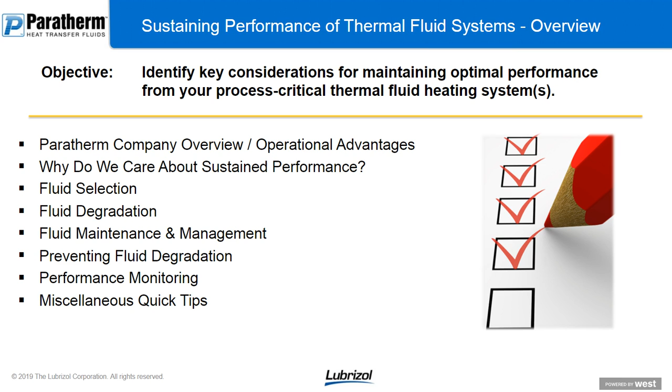A quick word about Paratherm. Paratherm was founded in 1988 and later acquired in 2012 by the Lubrizol Corporation. Lubrizol is a wholly owned Berkshire Hathaway company. Established in 1928, Lubrizol is a global leader in specialty additives, advanced materials, and oil field solutions. Paratherm operates under the CPI Fluid Engineering Industrial Products segment of Lubrizol.

Modern day, Paratherm offers a range of fluids engineered for closed-loop liquid phase thermal fluid systems for heating, cooling, or both, with operating temperatures from negative 127 degrees Fahrenheit to 675 degrees Fahrenheit.

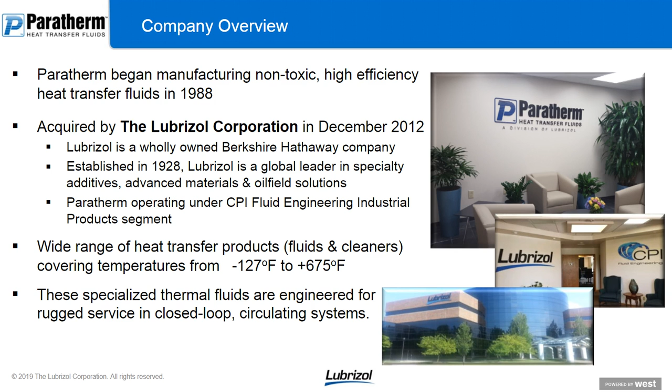Some key advantages of working with Paratherm: products are stocked strategically across the world, and material is always ready to ship. There are essentially no lead times. 24-hour emergency shipping is available, and sales and technical support is also available around the clock.

When it comes to quality, compliance, and technical resources, Paratherm is backed by world-class support through the Lubrizol network, with extensive test capabilities, a highly efficient supply chain, and extensive regulatory knowledge.

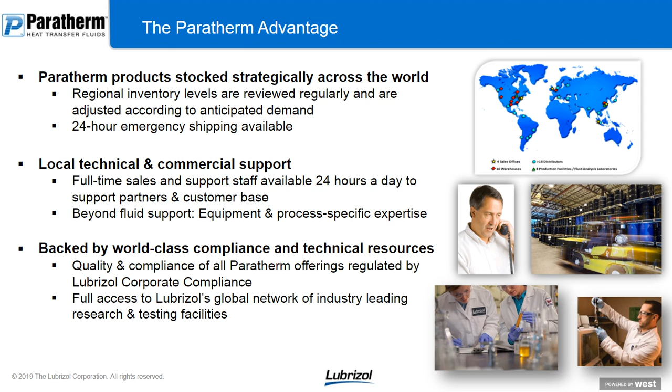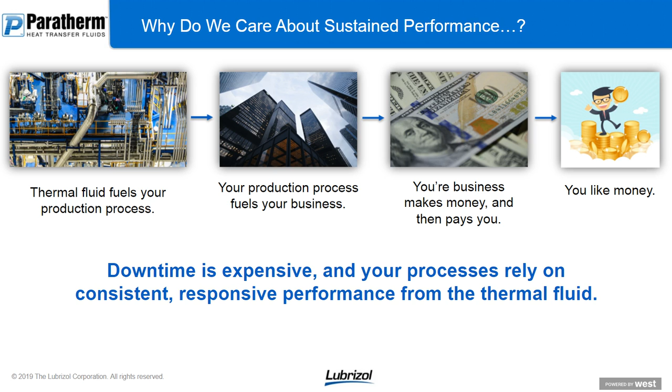So let's jump right in. Let's ask ourselves, why do we care about sustained performance? It's simple: thermal fluid fuels your production process, your production process fuels your business, your business makes money, and then they pay you, and you really like money. In all seriousness, downtime is expensive, and your processes rely on consistent, responsive performance from your thermal fluid. That is truly why we care about sustaining performance.

So let's talk about how fluid selection impacts sustained performance of your thermal fluid. Some definitions: what are we talking about? We're talking about heat transfer fluids, also known as thermal oils or thermal fluids, heating and/or cooling fluids, hot oils, etc. Often a thermal fluid may be recognized solely by its brand name, such as Paratherm. The point is, I want everybody to be aware that there are several aliases for heat transfer fluids, and you may come across one or more of these terms when comparing fluids from different suppliers.

For those who are not aware, some characteristics of thermal fluids: unlike steam systems, thermal fluid systems are capable of generating high temperatures with low system pressures. When properly operated and maintained, thermal fluids offer safety, little ongoing maintenance, and long operating lifetimes. Thermal fluids are highly efficient, non-corrosive, and allow for accurate, uniform temperature regulation in a wide variety of processes.

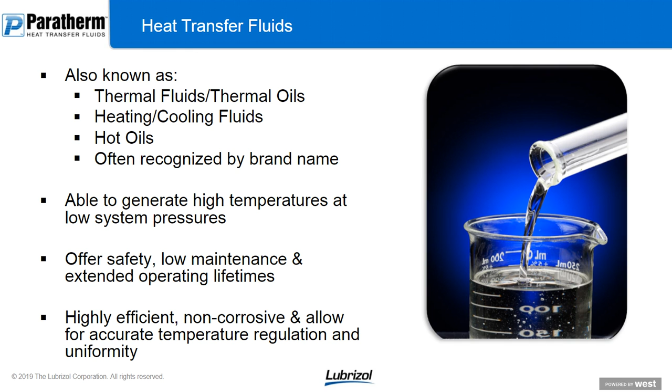In terms of fluid classifications, there are a plethora of different chemistries available on the market that can be considered heat transfer fluids. By far, water and glycols tend to be the most widely utilized. However, they are limited in their operating range, and that's where a lot of the other chemistries come in.

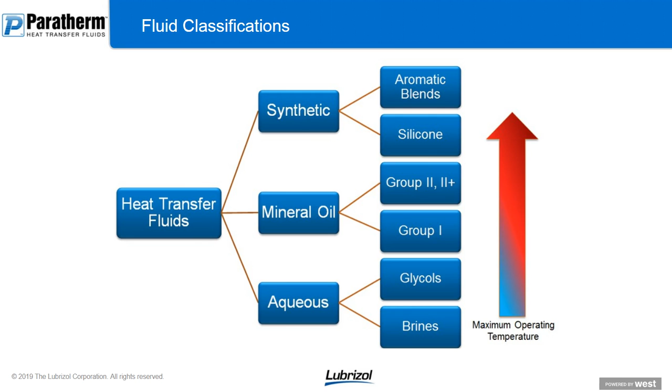So first and foremost, selecting the proper fluid. The most important aspect of sustaining performance is using the proper fluid matched to your application. There are several selection criteria to focus on when making the right choice for your thermal fluid system. The questions for consideration are, what are the minimum and maximum operating temperatures going to be? What is the lowest startup temperature that could be experienced given the climate and environment?

What is the fluid purity? Lower purity fluids may have higher fouling potential. Is there any benefit to using a fluid with specialized additives in your application? Something to note is that additives may narrow the operating range of the fluid.

Is there any preference for a synthetic fluid versus a mineral oil? Are there any considerations to be made with existing fluid chemistry or any handling and disposal concerns at the plant level?

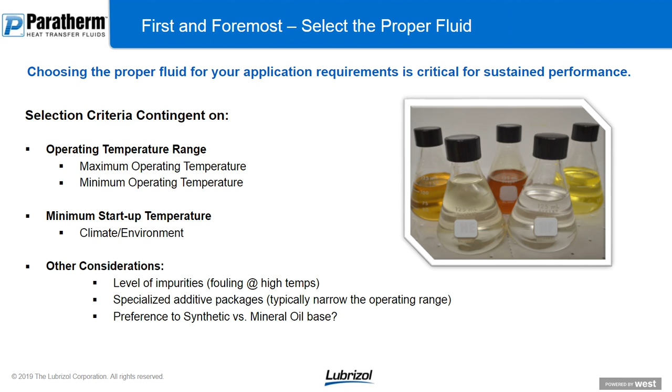And then there are process considerations which may also affect the fluid choice. Is this an existing system? If so, then fluid compatibility must be taken into consideration. You don't want to mix fluids that might not be 100% miscible in the system.

Is this a continuous process or a batch process? Continuous operation means that accelerated degradation of the fluid may occur.

Again, we have to consider the local climate. What are the environmental maxima and minima? Is the system vented to the atmosphere? If yes, then oxidation potential should be minimized, and consideration of vapor odor should be taken as well. Does the system require heating and cooling capability from the fluid? Keep in mind, certain fluids are advantageously engineered specifically for heating and cooling purposes.

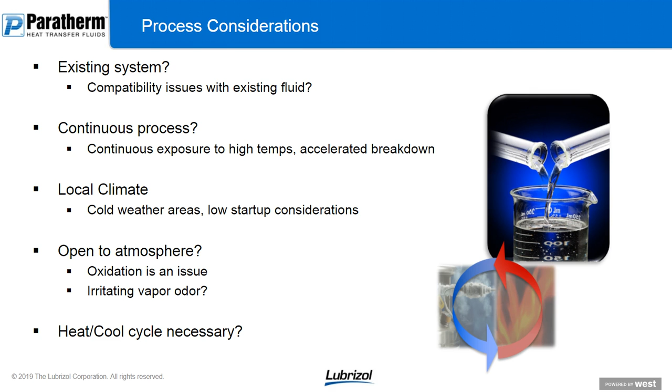In terms of performance considerations, heat transfer fluids that are engineered for sustained performance will maintain a balance of purity, stability, and efficiency. In addition, some ancillary features to consider might include the thermal expansion rate, the flash or fire point, the fluid's inherent resistance to oxidation, the vapor pressure of the fluid over the operating range, and the cost of the fluid versus the anticipated performance of the fluid.

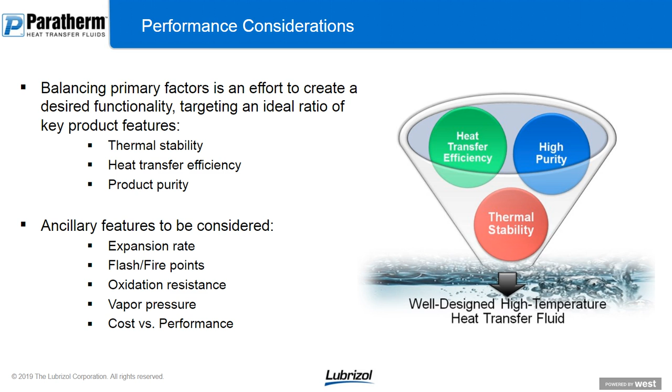So, when it comes to making the right choice, it comes down to the age-old saying, don't put a square peg in a round hole. The ideal product for a given application will,

Meet the minimum and maximum temperature requirements with cushion. In general, you don't want to select a fluid with a maximum operating temperature that's equal to the average bulk operating temperature. There may be some exclusions for high temperature liquid phase service where options can get limited at very high temperatures. But in general, having some cushion there will help minimize degradation of the fluid.

The ideal product will be compatible with all system components as well as the operating environment. If you're in northern Montana, for instance, you may need to consider how the local climate could affect your startup conditions.

The ideal product will provide a reasonable lifetime given the process conditions. Keep in mind that lifetime of the fluid is highly dependent on many process and system variables. In general, it's always a good idea to contact your fluid supplier for assistance in selecting the most appropriate product. Your fluid supplier will help make sure that you are getting the level of performance you need from your fluid.

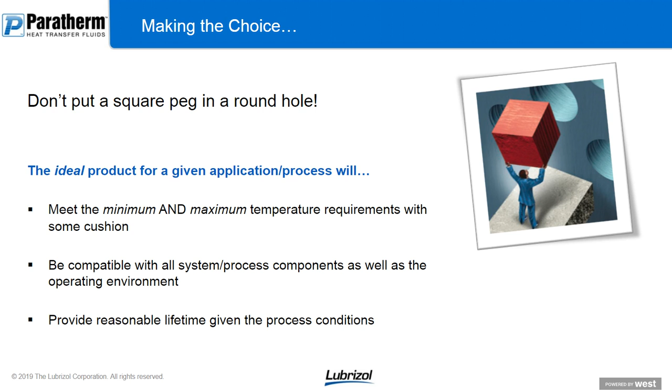So with proper fluid selection behind us, let's go ahead and switch gears and discuss fluid degradation.

So you might be asking yourself, why do we even care about fluid degradation, Ed? Because fluid degradation either reduces the safety margin or increases the amount of maintenance required of the system or the fluid. We need to acknowledge that fluid degradation over time is normal and inevitable. However, the goal is to minimize the rate at which it occurs.

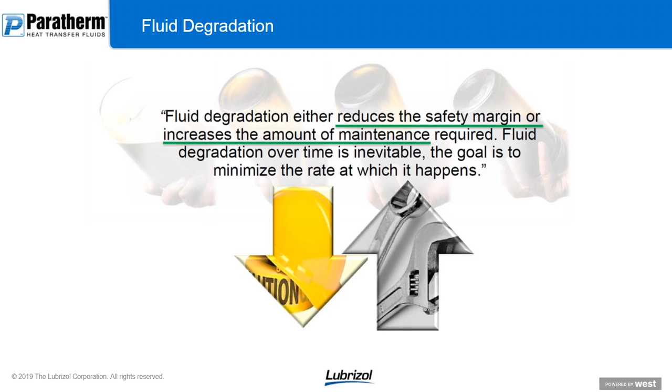So what happens to the fluid? Well, demanding process conditions put excessive stress on the fluid and cause it to break down. After several thousand miles, your engine oil loses its effectiveness to properly perform its job, so you take it to the local Jiffy Lube to keep it purring nicely.

Thermal fluids are very similar in this regard. Over time, fluid properties and composition can deviate outside of established optimal ranges due to external stresses, reducing the fluid's ability to properly perform and ultimately threatening process requirements.

In general, there are three possible degradation pathways for the fluid: thermal degradation, oxidative degradation, and contamination. There's also potential for any combination thereof.

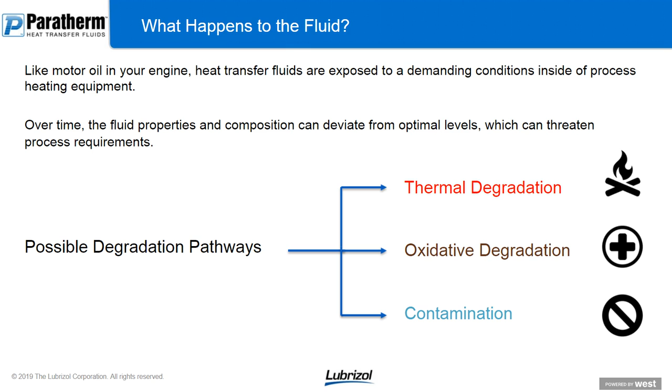Let's talk about thermal degradation. Thermal degradation is caused by excessive thermal stress on the fluid due to low velocity, burner misalignment or malfunction, improper startup or shutdown procedures, and/or coking of the heater tube or heater elements.

The effects of thermal degradation are serious: permanent damage to the chemical structure of the fluid and subsequent changes in physical and chemical properties, such as viscosity, density, flash point, heat capacity, or thermal conductivity. Thermal degradation impacts coking potential, proper pump operation, total system efficiency, and also operational safety.

How do we identify thermal degradation? The fluid may smell like gasoline or diesel. Distillation analysis may indicate deviation from baseline values in terms of low or high boilers. Significant changes in viscosity may also occur, either low or high.

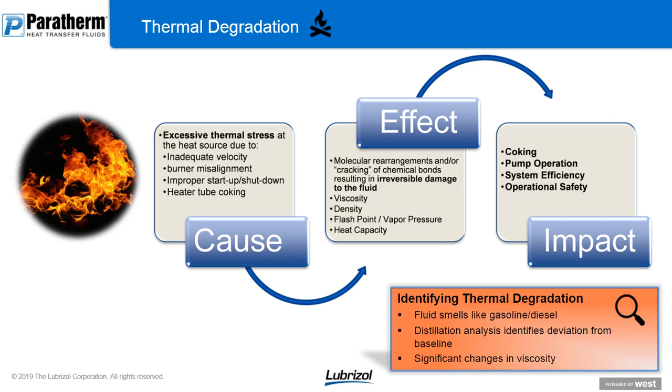Let's talk about oxidative degradation. Oxidative degradation is a result of hot fluid reacting with atmospheric oxygen in vented expansion tanks and reservoirs. The effects of oxidation are typically an increase in total acid number, which can lead to sludge, varnish, or coking, increased viscosity, or the possibility for corrosion of system components.

Oxidation impacts may include plugged lines, pressure drops, reduced flow rates, fouling of heat exchange surfaces, cold spots, and reduced heat to the process. How do we identify oxidation, Ed?

Good question. We look for increases in acidity in the total acid number. Fluid thickening is a good indication of oxidation. Increase in solids is a good indication of oxidation. And a foul odor or even a darkening of the fluid can indicate that oxidation is occurring.

Contamination is typically caused by process leaks, moisture ingress, or operational error, such as adding the wrong fluid to the system, sharing process equipment such as pumps or lines, or inadequate cleanout procedures. In general, contamination affects fluid quality and/or critical fluid properties.

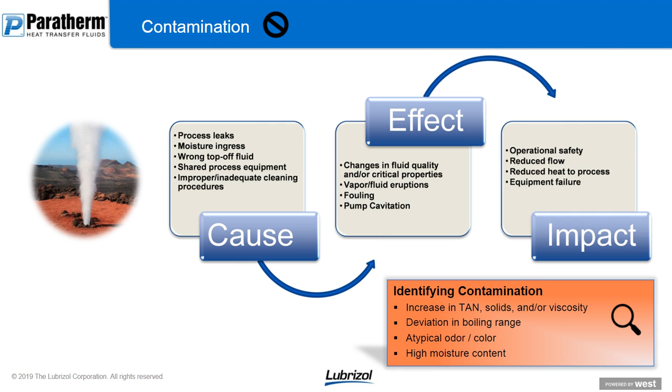In the spirit of discussing fluid degradation, let's take a quick look at fluid appearance. Color is something that customers often question. They say, hey, my fluid is black, it must be bad. In reality, in-service fluid may naturally darken over time.

This is especially true for systems that are vented to atmosphere. Color is a very basic indicator of fluid degradation. Most fluids that have been in service for more than one year will be yellow to amber in color. Often, fluid may look black, but when shaken and observed under a light source, most fluids will show that they are actually a dark amber in color rather than black.

Fluid that is truly black is most likely heavily oxidized or degraded. This simple visual analysis provides a quick way for anyone to assess the general health of their heat transfer fluid.

Safely take a sample from the system into a glass jar. Allow it to sit and equilibrate for a short time. Slowly invert the sample under a light source and note: is there any level of sediment in the bottom of the jar?

Then shake the jar vigorously and observe how long it takes for the film to clear up on the side of the jar. High levels of sediment or a long time to clear indicate that there could be heavy suspended solids or heavy sediment moving through the pipes of your system.

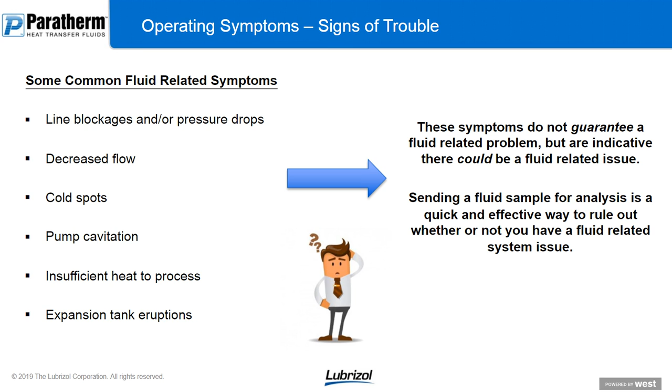So let's review some of the signs that there might be a fluid-related issue going on. Some common fluid-related symptoms: line blockages and/or pressure drops, decreased flow, cold spots, pump cavitation, insufficient heat to process, expansion tank eruptions. Note that these symptoms do not guarantee a fluid-related problem, but they are indicative that there could be one. Sending a fluid sample for analysis is a quick and effective way to rule out whether or not you have a fluid-related system issue.

So let's talk about the importance of fluid maintenance on sustained performance. Condition monitoring of your thermal fluid is critical for sustaining performance. As we've discussed already, changes in fluid quality can impact the ability of the system to meet anticipated demands and can lead to unplanned downtime.

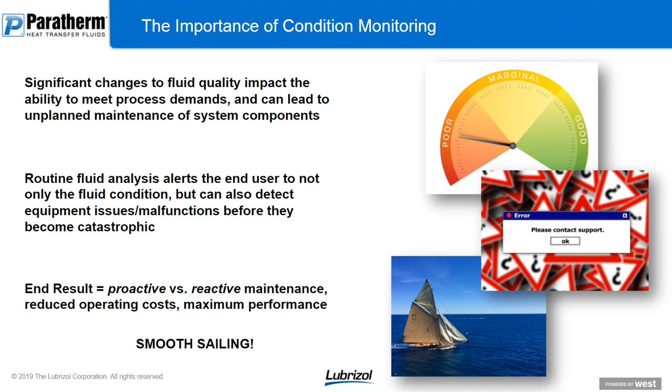Routine analysis alerts the end user to both the fluid condition and also can help detect equipment issues or malfunctions before they become catastrophic. And so the end result is proactive versus reactive maintenance. And when you're proactively maintaining the system, you're most likely going to get maximum performance from the system and reduced operating costs overall. In other words, you'll be smooth sailing.

So a quick primer on fluid analysis. When should you analyze your fluid? New systems should be sampled within the first year of operation and annually thereafter. Existing systems should be sampled within the first month of startup and annually thereafter. And any time a possible fluid-related symptom is observed is a good time to sample.

What should you analyze? You should ensure that the fluid testing is specific to heat transfer fluids. Acid number, viscosity, carbon and solids loading, and distillation range, and/or flash point are considered standard tests in the industry. The analysis report should include proposed causes for deviation from baseline values, and corrective actions should be recommended.

In terms of how to take a fluid sample, for high temperature systems, ideally the fluid sample is taken hot, around 180 degrees Fahrenheit or so, with the pumps running from an active part of the system. Somewhere around the pump suction is usually a good place to take a sample. Some systems may be fitted with a true sample port for this purpose.

Purge some material from the sample port to clear it out. Take your sample directly into the container that will be sent to the lab. In other words, don't take a sample into one container and then transfer it into another. Doing so could give incorrect recommendations. It's important to note that safe sampling practices should always be observed with high temperature heat transfer systems. Samples from the expansion tank may not be representative and should be avoided.

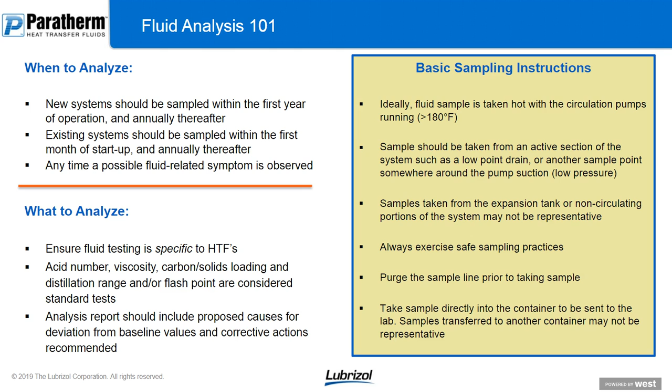So let's discuss in more detail the critical tests for determining the health of your heat transfer fluid. Total acid number is run by ASTM D664. Acid number measures the level of organic acids in hydrocarbons via potentiometric titration. The meaning of the acid number test is that it is indicative of the degree of oxidation the fluid has undergone and/or can indicate potential contamination.

The lower action limit can be 0.2. We can see carbon levels being generated with acid numbers as low as 0.2. Proactive maintenance may suggest partial replacement depending on the level of carbon loading. In terms of the upper action limit, acid numbers in excess of 0.4 are generally associated with heavier carbon levels and may warrant partial or full replacement depending on the carbon loading. I should note that carbon can also be managed with filtration.

For systems that do not have filtration, these action limits may be more important.

Kinematic viscosity is measured by ASTM D445. Viscosity is a measure of the fluid's thickness or resistance to flow as a result of internal friction. Viscosity increase is indicative of oxidation and/or can indicate potential contamination. Viscosity decreases are generally indicative of overheating. In general, the lower action limit is plus or minus a 35% change in viscosity and indicates the molecular structure is compromised. Proactive maintenance might suggest a partial replacement with levels around 35%. Deviation in excess of 50% from the original baseline value indicates significant molecular changes to the fluid. At this point, replacement is generally warranted.

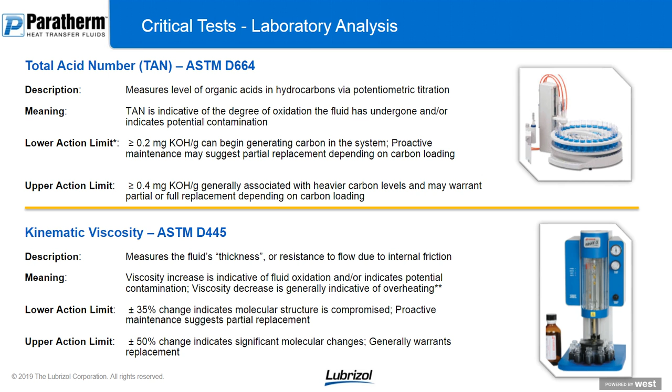Distillation range is assessed by ASTM D2887. We use gas chromatography to separate all components in the fluid by their boiling point. Recall that heat transfer fluids are often a mixture of different components, and so they have wide boiling ranges, and that's what this test helps us see. An increase in lower or high boilers relative to the new fluid baseline indicates that there are changes in the molecular structure as a direct result of fluid degradation and/or potential contamination.

If low boilers are elevated, it is indicative of overheating and thermal stress on the fluid. If the high boilers are elevated, it is also indicative of overheating, oxidation, and/or contamination. In general, low boilers or high boilers in excess of 9% may suggest a partial replacement of the fluid to help restore optimal properties.

Low or high boilers in excess of 12% might suggest that a full replacement of the fluid is necessary in order to maintain optimal properties of the fluid and optimal process requirements.

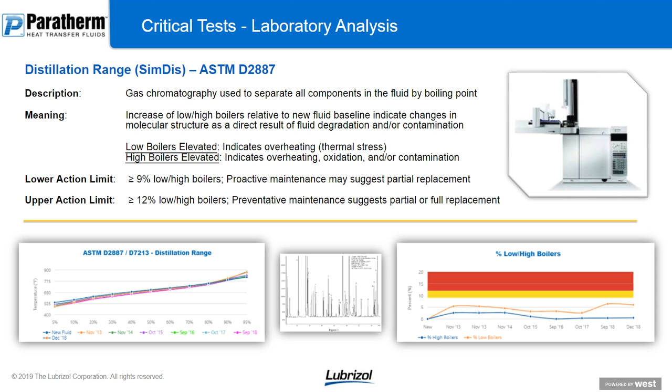So you've noticed a decrease in performance, and your fluid analysis came rated in poor condition. Time to replace, but is there anything else you should do? A fluid changeout alone may not restore performance to optimal levels. In that case, you may consider system cleaners. Cleaners should be considered if degradation byproducts have been detected and performance has dwindled.

There are two basic types of system cleaners. First, there are solvent-type cleaners that are typically used at 100% concentration and help to chemically dissolve degradation byproducts.

Alternatively, on-the-fly additive-type cleaners work by replacing a small volume of the system fluid with the additive cleaner. The cleaner is run under normal operating conditions. It works over the course of a few weeks and is later discharged, and the system is refilled when convenient for the plant. Whether you're cleaning or not, waste oil and/or cleaner should always be responsibly recycled or disposed of per local regulations.

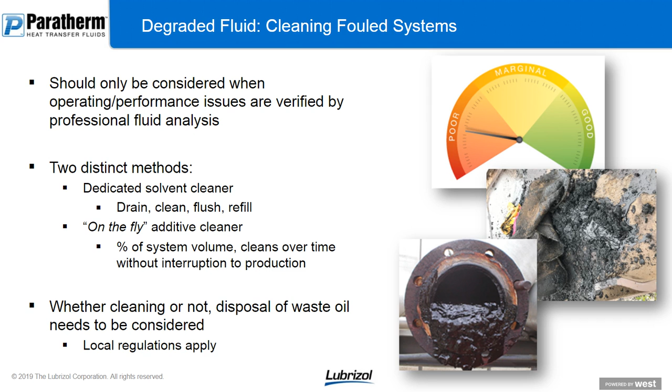Now that we've discussed the different kinds of degradation that can happen, and also how we can detect that degradation with laboratory analysis, the question remains: what can you do to prevent fluid degradation?

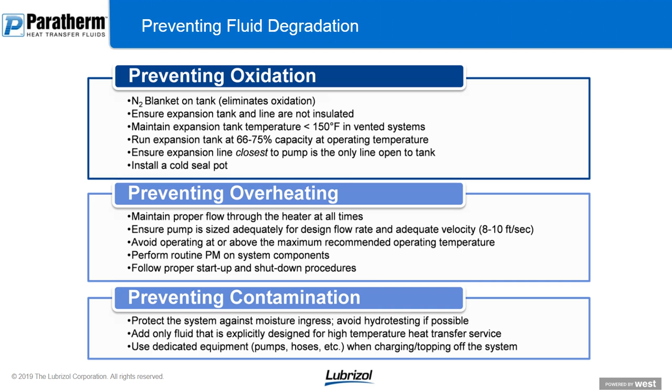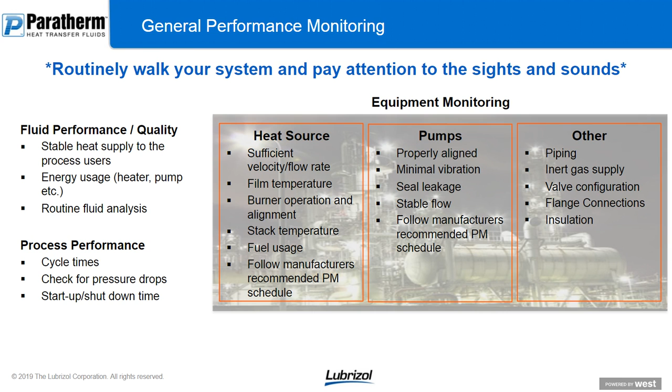Lastly, I wanted to provide some quick tips that we may or may not have already covered in the previous slides.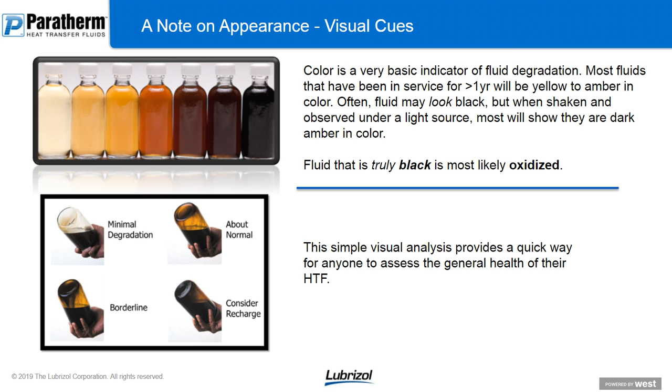So there's no hard rules here. Keeping the fluid clean is a good goal, and side stream filtration definitely helps with that, and it helps prevent the situation where you have significant accumulation of degradation byproducts in the system.

The acid number will, generally if you have heavy carbon levels, assuming it's not from contamination but from oxidation, continue to stay high. In some ways, even if you're filtering, that acid number may stay high. It may go down if more carbon continues to form from those acids, and it might also continue to go up if the fluid continues to oxidize.

So again, filtration can help protect the fluid, but filtration is more about protecting the system components and making sure that everything continues to hum along nicely, rather than protecting the fluid itself.